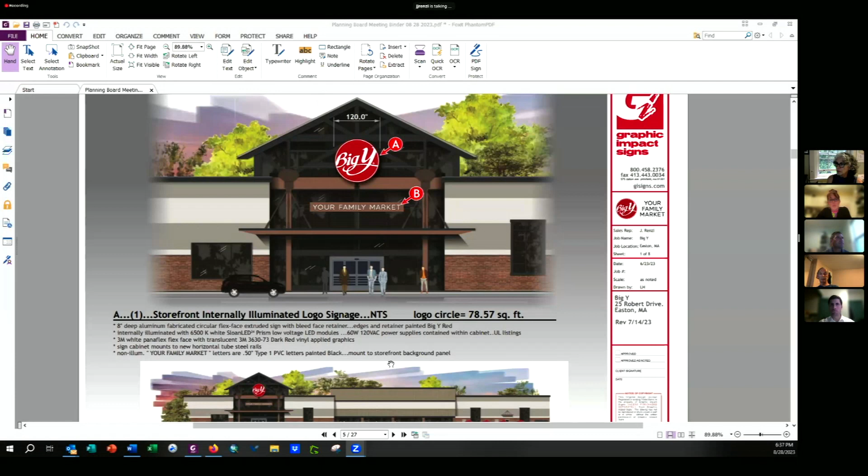Does anyone have any questions or comments on this wall sign and pylon sign change? No, neither. All right, let's go up to the building. Okay, so for the building signage, the existing signage is very similar to the proposed signage.

What Big Y wanted to do is this was originally a Hannaford location. The sign sat very high on the building, and they wanted to make it more aesthetically appealing. So we are looking to take the same size sign and lower it on the elevation where the logo is, and then where Your Family Market is shown, that's also lower, as the World Class Market sat higher on the building.

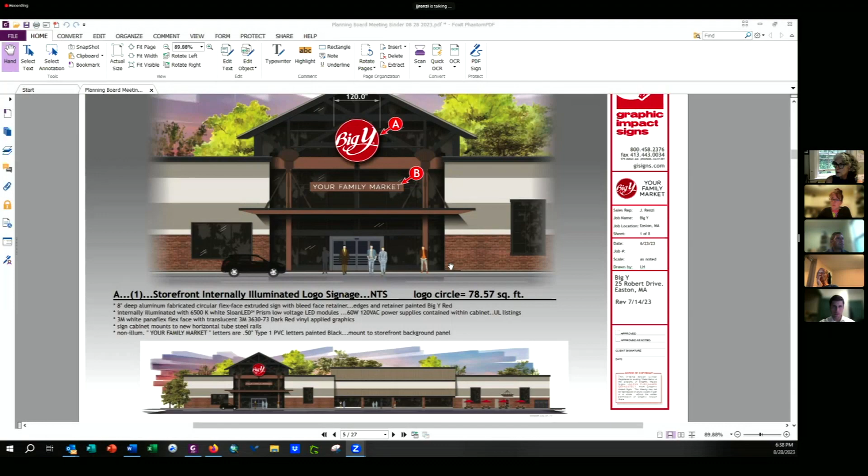So this was sitting awfully high because that's where the structure was for the Hannaford supermarket. Where Big Y was, they had their large logo with fruits and everything. And where World Class Market is, they had a much larger Hannaford set of letters there, like double the size. So when Big Y took over those locations, they just put the signs back in the same spot.

If you scroll back down a couple pages, you'll see the new paint scheme that has already been introduced. They are using some nice, neutral earth tone colors, and we are lowering the logo and the graphics on the fascia as compared to what's existing. Square footage remains the same.

The Big Y logo is currently internally illuminated. The replacement sign would also be internally illuminated. The World Class Market was not illuminated, so therefore we're not going to illuminate the Your Family Market.

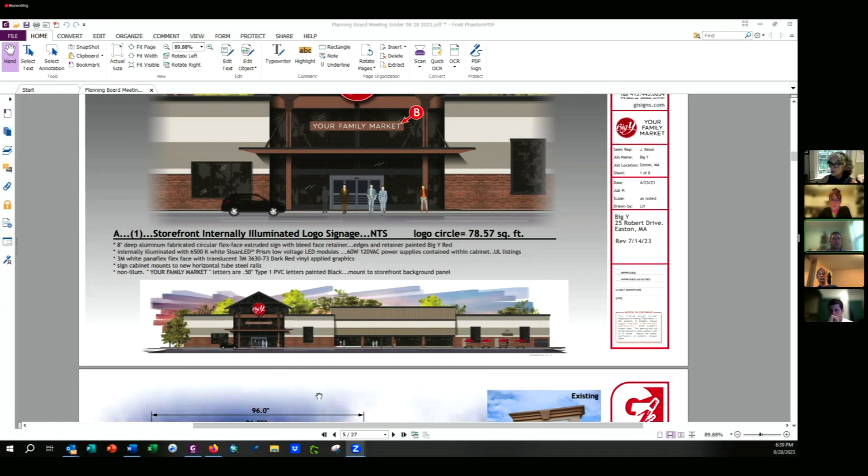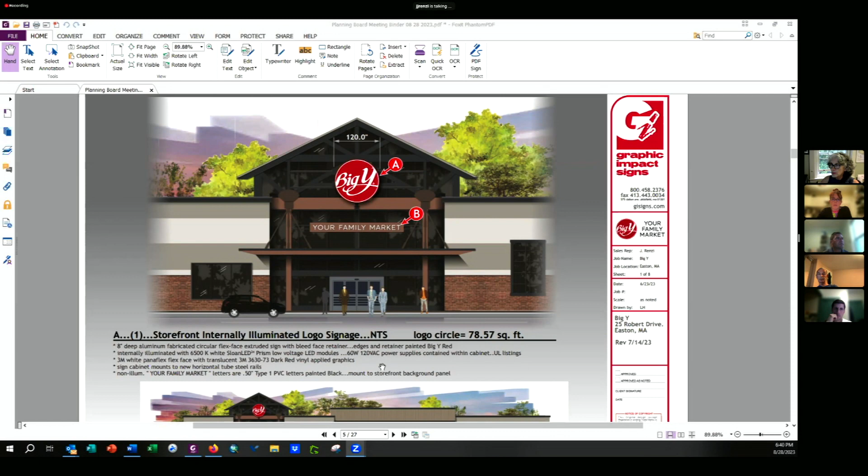And the circle Big Y sign is a light box. There's no offset, the Big Y doesn't bump out or anything. Correct, it's exactly the same size, same type of sign. It's a newer sign with LEDs in it that gets lowered on the fascia. We had to do different brackets because of the engineering and the attachment, and make it structurally feasible as well.

Okay, board members, any questions or comments? Stephanie, you had a few notes. Were there any that you feel you should share with us?

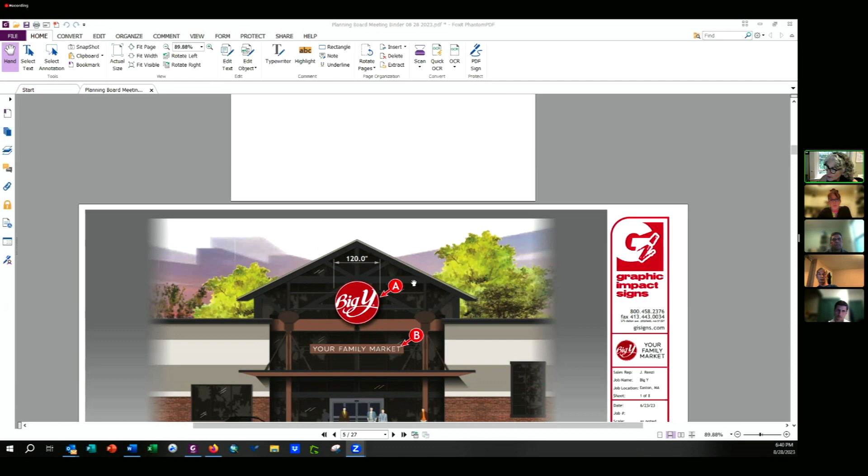No, I think that it meets the standards and the guidelines. If I'm looking at it, I don't know if I'm gonna draw with my hand here, but if that's some of the structural changes that are needed, it actually seems to emphasize the kind of a little bit industrial looking architecture, but I think it's appealing.

Yeah, it looks like they were just kind of redoing the whole facade and entrance, right? So it was a good time to move brackets around and get the signs where they want them.

Cool, are there any comments from the public on these two signs? Let me stop sharing so I can see if anybody raises their hand. I don't see anything, anybody raising their hand?

Okay, in that case, we could entertain a motion. Motion to approve the signs for 25 Robert Drive for the two pylon signs and one wall sign as presented. Kevin, second, Stetson. Okay, all in favor: Kadam, aye. Stetson, aye. Wolf, aye. DeShane, aye. Okay, those signs passed. Thank you.

Thank you very much, appreciate it. Good luck with your car. Thank you.

So we have a couple continuances. Is that am I reading this correctly, Stephanie? Yes. The first one's to September 5th and the second one to September 18th.

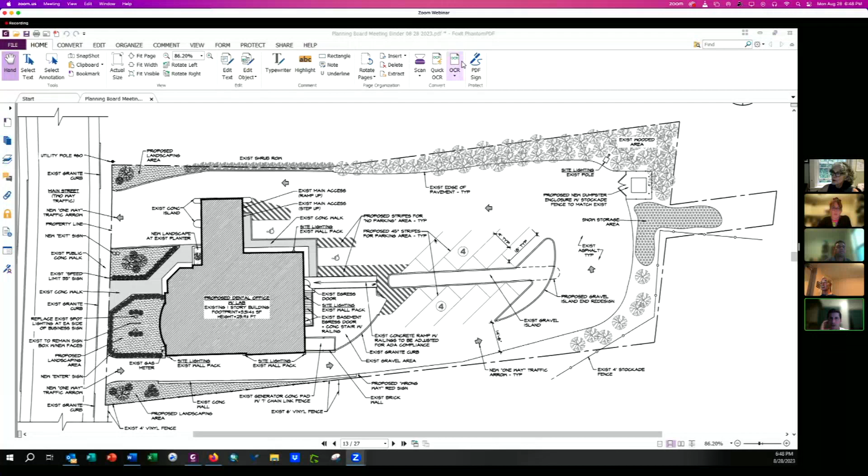So, all right, how should we move along here? Motion to approve the site plan with the condition of the restriping and the dark sky friendly light installation.

Stetson made the motion, Kevin seconded. Just a note for further discussion, which we don't have to resolve: there's a utility pole on the northeast side that has a light pointing into the parking lot, but I'm not going to hold up our vote on that. I'll just note for the record that the owner will pay the utility company to put a light up there, and then they pay for the electricity. I think that's how it works.

Okay, so there's a motion here. Any further discussion? No. Okay, all in favor? Stetson, aye. Kadam, aye. Wolf, aye. DeShane, aye. That passes.

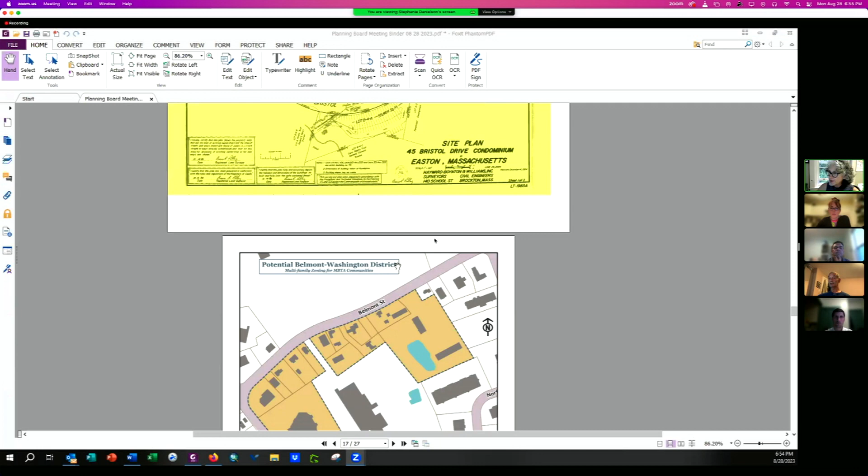For review purposes, the two districts are the potential Eastman Boundary District. This was modified from a version suggested previously, where parcels along the south side of Boundary Street were included, and the board decided to focus on the northern portion, which provides sufficient acreage to more than meet the contiguous 25-acre upland requirement.

Should we stay on that one while we're here? Does anyone have questions or comments? This isn't really the final version, we're going over everything. We're not making any decisions tonight. This is really an introduction to what the underlying zoning will look like, the actual zoning language, to review the draft.

So then it looks like there were only two vacant lots, and those are the two where there was kind of an informal discussion with someone who already owned that and maybe wanted to build some apartments there. That's something to really note, and maybe we need to think about whether they were ready to do apartments before. Well, they'll be more ready now, unless they spent their money on something else, right?

So, this is the Avalon multifamily complex, and that's just under 15 units per acre. And then this is the Big Y—I'm sorry, that's Target, not Big Y. And I think this is the new Starbucks. This is the new townhouse style development that Avalon recently completed a couple of years ago. This is the plaza itself.

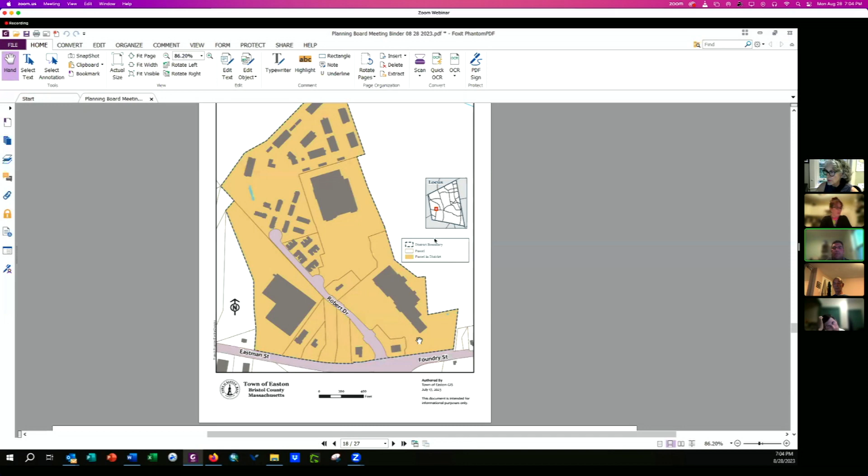We can impose, it's by right, but we can impose reasonable conditions and requests. So that would just be inherent to any kind of larger housing or really business development for that matter. Does that answer the traffic study component?

Well, I understand what you're saying, but it seems to me there's going to be some legal problems if you're requiring some of those things. No, we can do that. There's no legal problem requiring an applicant to do a traffic study.

Well, what it's going to mean though is that, because of the requirements to satisfy the statute, those traffic studies are just going to rubber stamp it, in my view. Well, no, that's why we have peer review, which was going to be the second part of what I'd propose for the traffic study component. Okay.

As far as writing item 3 goes, we haven't decided anything yet. We picked the ones we liked, and you can go back and look at the minutes. Suzanne takes very good minutes. We'll look at what we already have, and maybe that's something the planning department can put together. Once we get it more finalized, maybe that's something we could put on the website as part of this project.

Now, Stephanie, how about the sewer? Do you have any information?

If I may, I'd like to comment on all of that and add on to what you're saying. As far as the sewer goes, the guidelines make it clear, and Wayne can correct me if I'm speaking incorrectly, that it's not up to the town to decide whether there's enough sewer capacity or not. But we do have capacity, and we will double check on that.

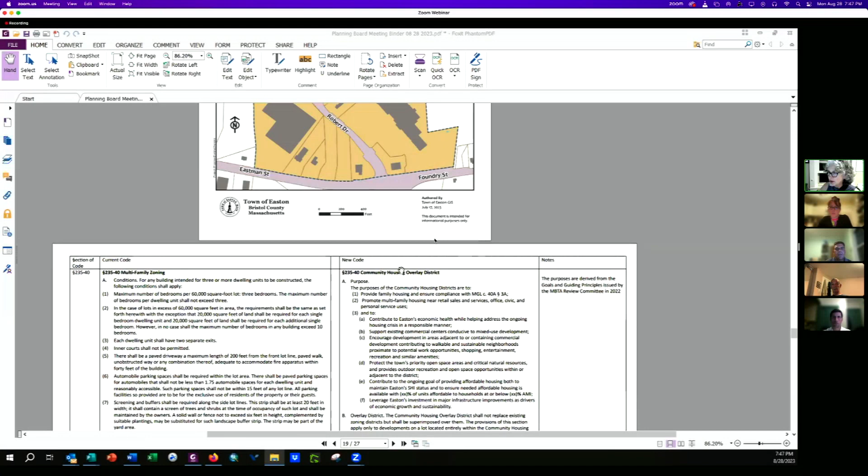Well, that was interesting. Stephanie, want to move on to the next picture? Yes. At some point, I think it would be very helpful to talk about what the zoning looks like, because it will be easier to have a subsequent conversation about districts if the board is still contemplating that potential good conversation about districts. So, here we go.

Let me do this. Okay, so can everyone see that? This is the potential Belmont, Washington district.

Okay, so this is the potential Belmont, Washington Street area. This is 19 acres in total. It includes the former market, it is still the marketplace. They actually own this parcel, and the parcel actually extends over here. This is an underutilized area. This blue area is a detention basin, but the rest of this area is not.

Right, that's the parking lot behind Wendy's. Right, this is where Belmont Arms is located. There is a 34 unit apartment complex here, and about half of those units, probably 16 to 18 units, are pre-existing. Then you have a mix of other commercial properties.

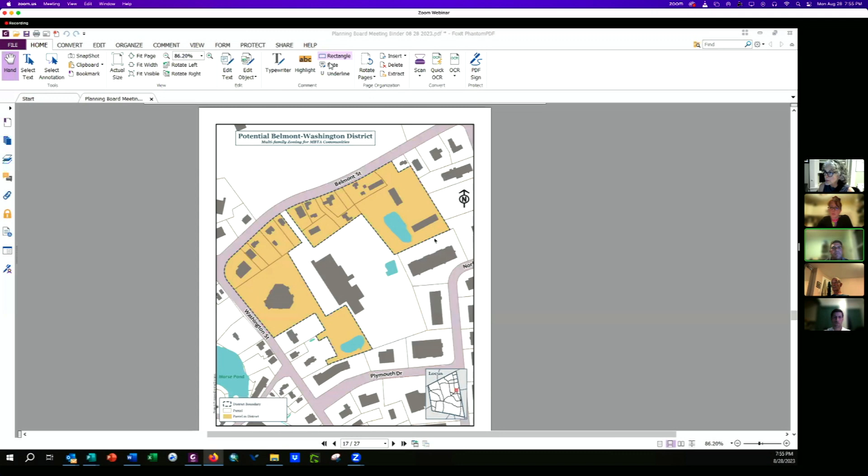I think the logic isn't saying to decide, but we need a little structure here. It's not just like, let's take a peek at the maps and have a 2-hour discussion about it. But I think we've got some pretty good input, maybe a few other ideas we could do on the map side of things. You guys want to move on to the actual zoning bylaw for a bit? I'll take that as a yes.

Okay, so the way we were looking at the zoning, we actually looked at Lexington's model because it seemed pretty simple and straightforward. Right now, section 235-40 of the Easton zoning code is multifamily zoning, but any members familiar with this know it basically prevents any multifamily zoning from being built. You have to have 60,000 square feet of land for the lot, and then you can have up to 3 dwelling units, but you're limited to 3 bedrooms. So it pretty much zones against multifamily. The idea is since this isn't effective anyway, eliminate it and replace it with the community housing overlay district.

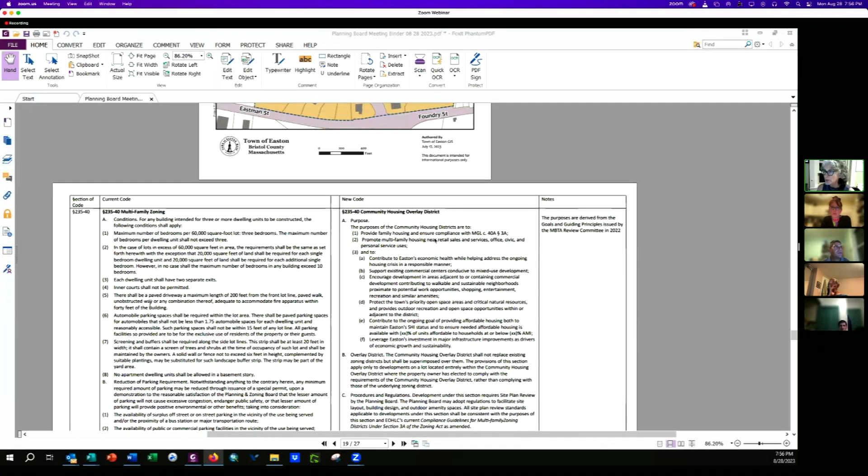No, I'm saying just on the left column, that is our existing Easton zoning. Yes, that's the current multifamily zoning, that's what I thought. And everything in the left corner, you'll see it as it's working now. Did you say it wasn't working, or it just wasn't? It just doesn't work with the new approach.

It effectively disallows multifamily zoning just because of how restrictive it is. You mean the zoning that accommodated like a 20-unit apartment building isn't allowed? No, that's part of the Furnace Village District zoning. Right, so we're not proposing a major change, just a very minor one, since the two zones we're looking at already have somewhat accommodating multifamily zoning, Queset and Furnace Village. Correct, okay, just wanted to confirm that. But this section effectively zones against it. The zoning bylaw, yeah, the town zoning bylaw and the apartment section of that.

Yes, and this preceded the Queset, oh yeah, that was obviously just made to zone against apartments, okay? So let's look at what we're proposing here, what you've put together. Yeah, so the idea is rather than try to fit this in, that could be like completely 40 years old, just replace it.

We start off with the purposes which were defined by the MBTA Review Committee back in 2022, the goals and guiding principles, which are to provide family housing and ensure compliance with MGL Chapter 40A 3A, the MBTA community zoning, promote multi-family housing near retail sales and services, office, civic, and personal service uses, and to contribute to Easton's economic health while helping address the ongoing housing crisis in a responsible manner, planning these areas and where they should be located thoughtfully.